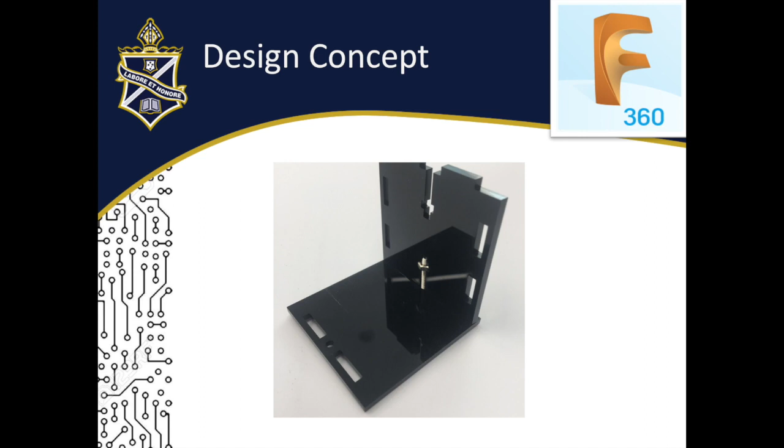Design must take into account the materials being used. The primary examples are material dimensions, the strength of material under tension and compression, and the design must take into account the types of screws being used, specifically their dimensions, which is somewhat dictated by the material being used.

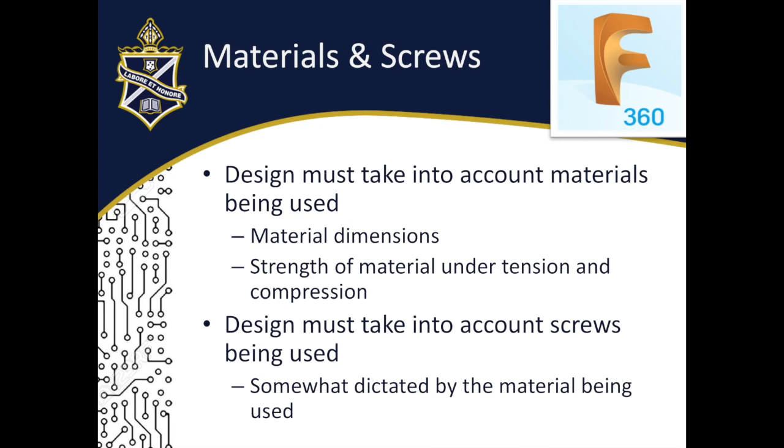The material that we're going to be using by example in this is going to be black acrylic sheeting. So the black acrylic sheeting, we have some key questions before we can begin our design. The key questions are how large are the sheets that we have? What's the largest cut size we can make?

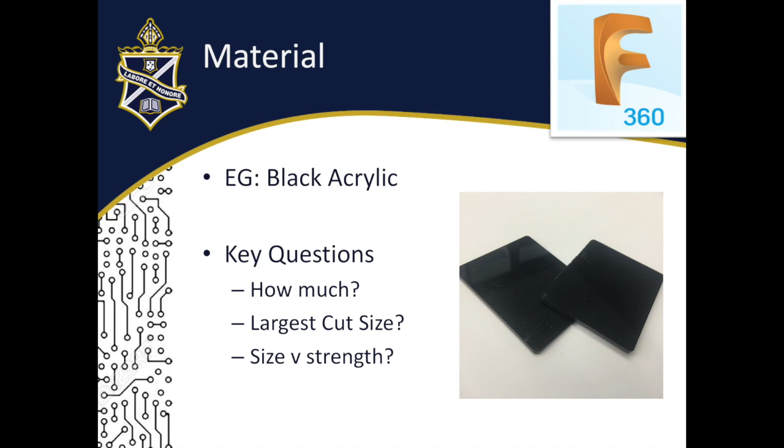And size versus strength. Can our material cope with being cut to the sizes that we're talking about? Will it be strong enough? For example, if we cut something that is 80 centimeters long but only 2 millimeters wide, will it be able to cope with that dimension?

The key property of our material that we're using is the thickness of the material that we're going to be cutting. Our laser will only be able to cut to a certain thickness, but we also need to keep in mind the thickness when we're creating our design. All panels made from the material that we're using can only be extruded in Fusion 360 to this thickness.

The thickness of the black acrylic looks like it measures at 3.2 millimeters. It is roughly 3 millimeters in thickness, so we'll extrude all of the panels made out of black acrylic to 3 millimeters. If we're going to use other sizes, we'll have to make those panels that thickness. For example, if we were joining 3 millimeter black acrylic with 12 millimeter pine, we would have to actually make those adjustments in our model on Fusion 360.

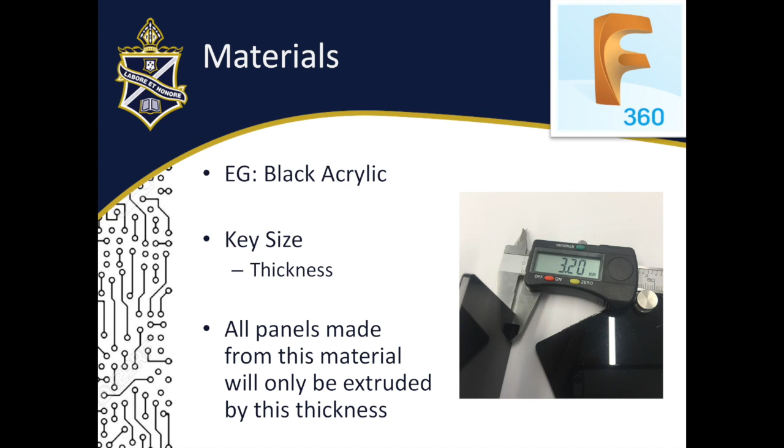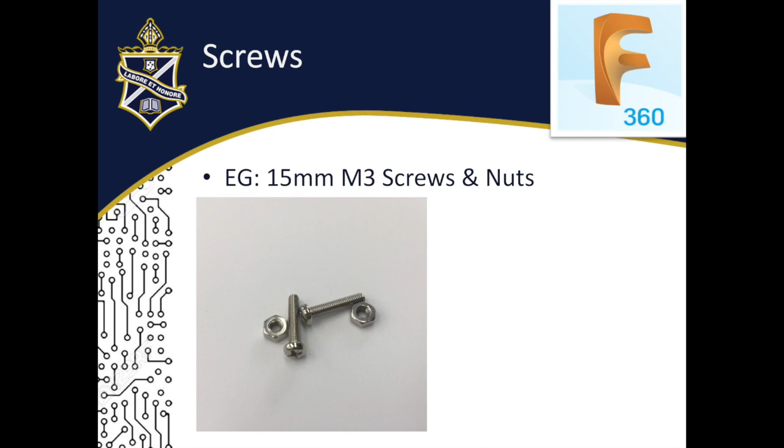Our hardware that we're going to use, the screws and nuts, also change the way that we do our design. The key part of these screws is the measurements that we have to do. We need to ensure that we measure carefully enough to be able to create a 3D model in Fusion 360. You can also research these measurements by looking up the size of the screw online.

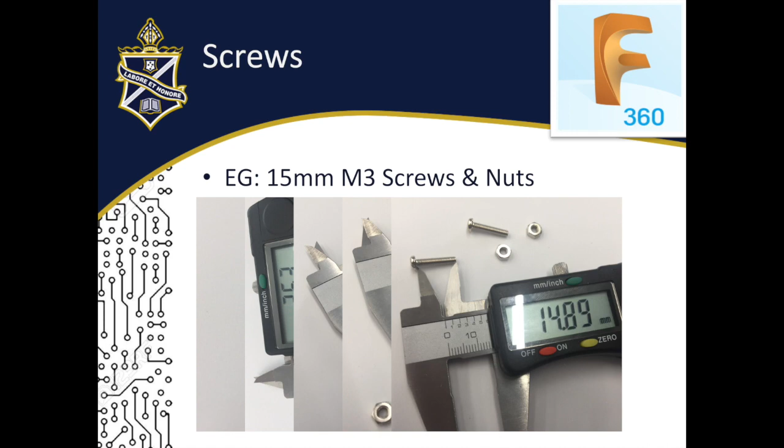For example, if I did a search on M3 screws and nuts, I should be able to get diagrams which show measurements on them. However, sometimes you don't know what size the screw you are using is, so you need to do lots of measurements. Once your measurements are complete, you should be able to draw them in Fusion 360 like I have now, or you can sketch them on a piece of paper.

I would only really go to the effort of drawing them in Fusion 360 if I was presenting to a client who was paying money and they wanted to see what the end result would look like with the screws in place, or if I was putting it into a portfolio for marking, I would definitely put the screws in any render that I did.

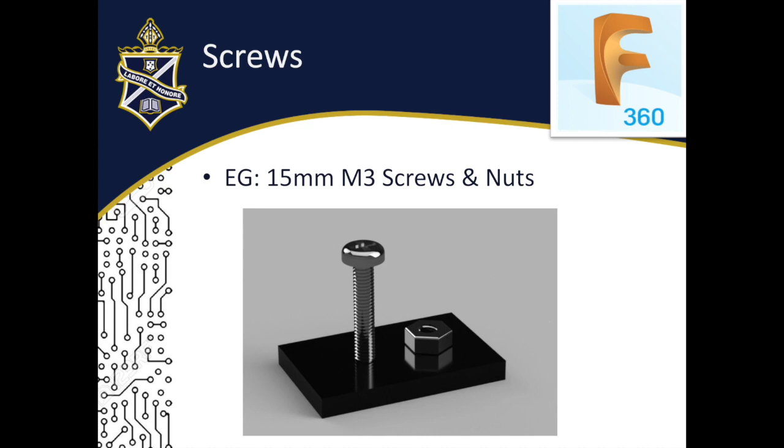The procedural overview that we'll be going through is that we need to first create an overlapping panel model. Basically, all of the panels that we will use will overlap into each other so that we can create joints later. Once we've created all the panels in place, then we create the material joints. Once we've created the material joints, then we can create the screw provisioning if needed.

For the first part, we're going to go into Fusion 360 and create our overlapping panel model. So here we are in Fusion 360, and here is the nut and bolt that I've modeled, which match perfectly to scale the measurements I've done on my particular nut and bolt that I'm using, which is an M3 15 millimeter long nut and bolt.

I don't need to use those in my model, and as I said, you would only use those in your model if you are A, selling to a customer and they wanted to see what it was going to look like, or B, if you're trying to get really good marks in your portfolio and you want to show the final product before you actually do it, so that you can do a compare and contrast and you can do evaluations and all that sort of thing. Showing those extra features will probably earn you extra marks because you're showing a greater understanding and vision.

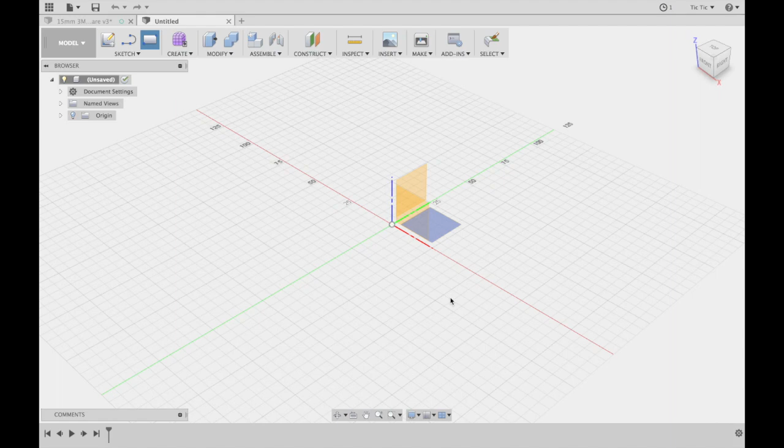But anyway, we're going to create a new file and we're going to create a new design. And for this design, I'm going to create a simple box with a couple of legs on it, so that we can cut out a box with no top, so that we can maybe put pencils or something in it, like a pencil holder on a desk, that sort of thing. So let's start with a new sketch. And basically my new sketch, I'm going to start with the main side that I'm going to use, which is going to be on this one here.

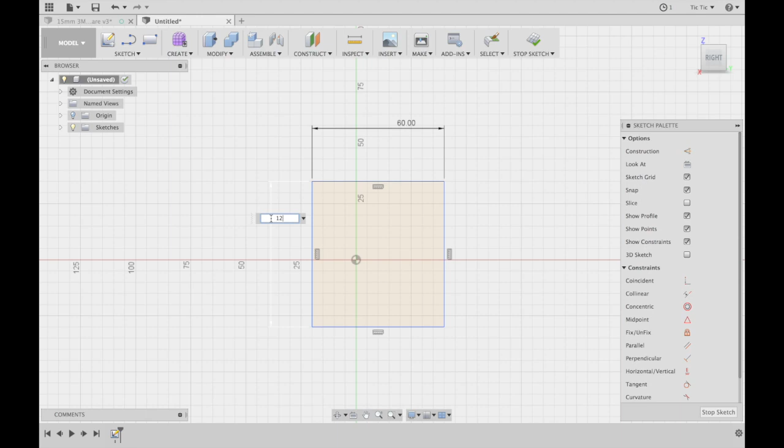And I'm going to create a rectangle. The rectangle is going to be of a size, let's set the dimensions straight off, let's just go 60 wide, so 60 millimeters wide, and we're going to go twice as high as wide, so 120 millimeters tall. Let's make sure that's in the middle. There are probably nicer ways of doing this, but I just tend to do it by typing in these dimensions here and here, and that's going to be set in the middle now. If I press on that and go 60, so I'm happy with that.

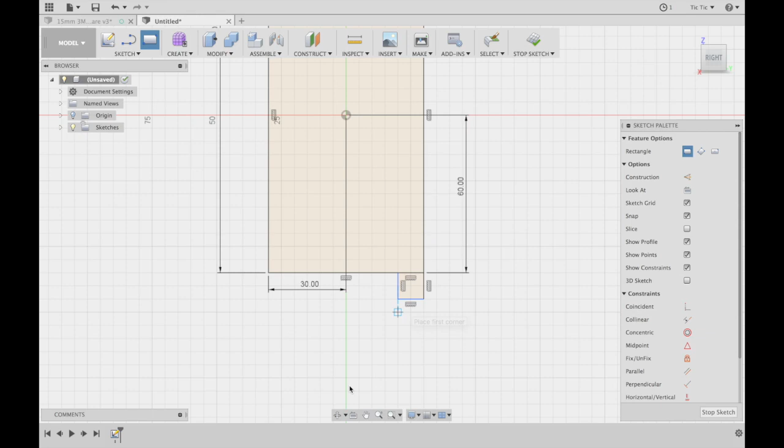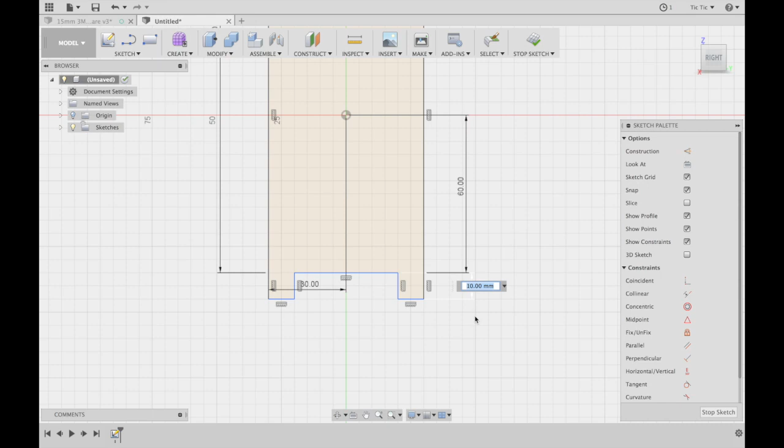I'm going to put some legs on it now. So basically going to come down here. I'm going to put another couple of rectangles. Let's put one there. We'll go out to that big, and we're going to put a rectangle here of that big. And now that I've got that, I'm going to trim off some excess pieces. Let's trim them off twice, so those are all trimmed off. They're 10 by 10, but let's just add that now. So let's go dimension here on this one of 10, just to make sure, and a dimension here of this one of 10. So those are set, and then we're going to do the same here, dimension of 10 and a dimension of 10. And that will be good.

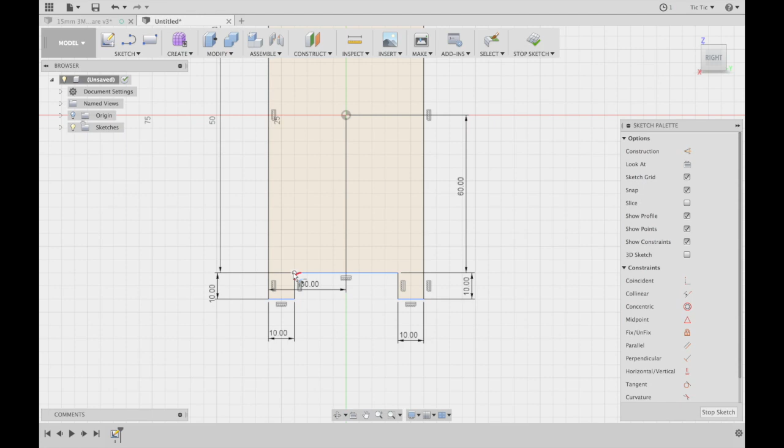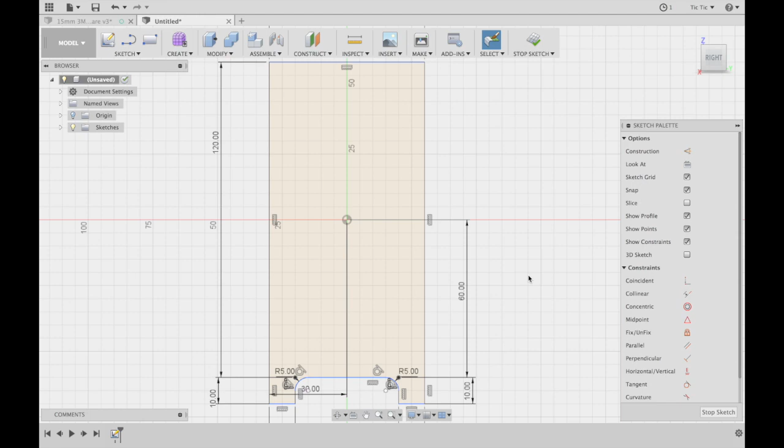Let's also just add a nice fillet in there to see what that's going to look like. And the fillet is going to be, let's just make it a nice 5 there. We'll do the same thing on the other side. Unfortunately, there's no shortcut for fillet when you're in sketch mode. And then go 5 on that side as well. So that we've got our piece there. That's going to be the side of the box. That'll be the feet or legs. I'm going to hit stop sketch now. I'm pretty happy with that size.

I'm now going to extrude it, and remember our material is 3 millimeters, so we're going to extrude it 3 millimeters. So that's our material there, and I'm using black plastic, so I'm going to change it straight away. Appearance, glossy black plastic, drag that on there. You can see that it's now blacker. I'll close that appearance panel, so that now I can see what I'm doing. For the benefits of this though, I actually might change the appearance to something lighter. So I'm going to choose a grey matte for the time being, so that I can better see it on the video. So I'm going to hit close. So that's my material there.

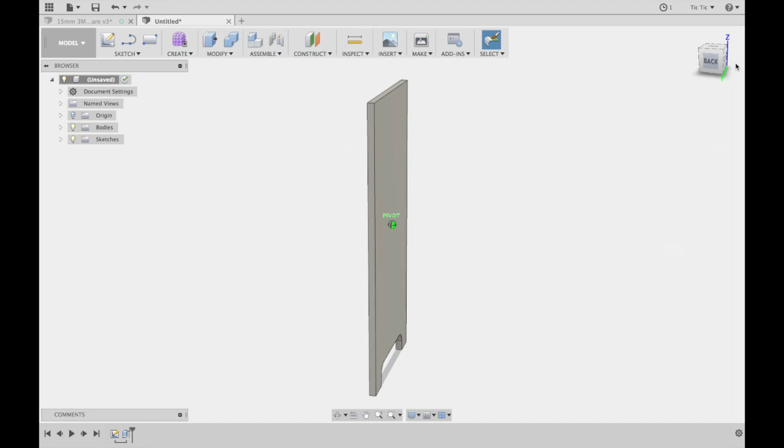I'm going to need 2 of these side panels. And you notice I haven't used components. I find using components a little bit funny when I'm designing like this.

But instead I'm going to rename my body. And my body is going to have the name of side panel. So I've got the side panel there. I've got caps lock on, so I'll turn that off. And I'm going to need 2 side panels.

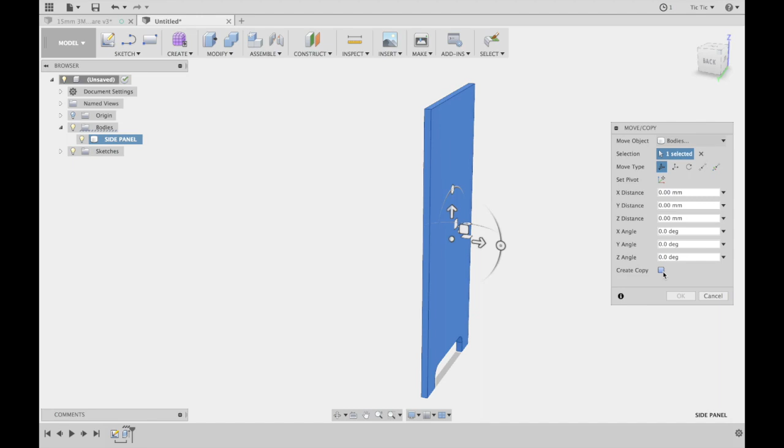So I'm instantly going to press the move key, and I'm going to move bodies. And I'll hover over this one here until it locks on the middle, and I'm going to create a copy. I'm going to move this one to be -60. I'll just leave it like that, -60 across, OK. So now I've got two panels.

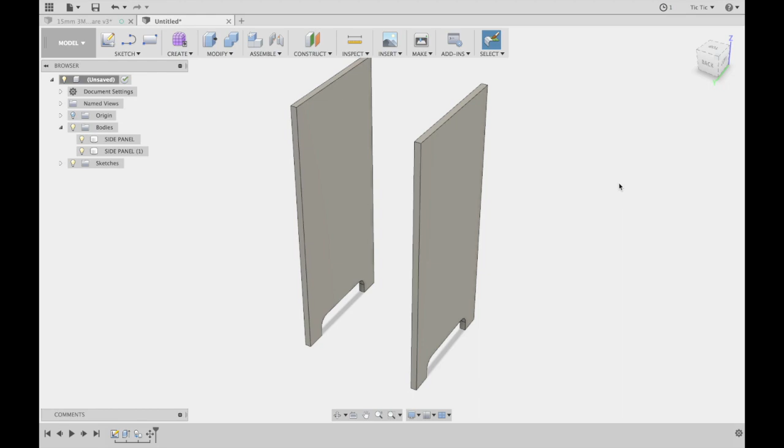I'm now going to draw in my side panels, or my front panel, this one on this front and back. So basically the thing that's going to hold the pens inside here between there and there. So let's create that on the side panel. I'm going to do that by creating a rectangle sketch, and I'm going to create it on this one here. So this new panel here, the side panel 1, I'm going to turn the other one off for the time being, so that I can see what I'm doing.

And I'm going to create a sketch on this that's just going to be a rectangle. I'm just going to draw the rectangle roughly in place, roughly where I want it, but not totally where I want it. Now with this type of design, particularly when you're working with 3mm, you can't join them right on the edge. If you're working with a thicker measurement, you could probably join them on the edge and use a smaller diameter screw, but I don't have a smaller diameter screw that's going to match this, and if I go too close to the edge, it's going to be a weakened joint.

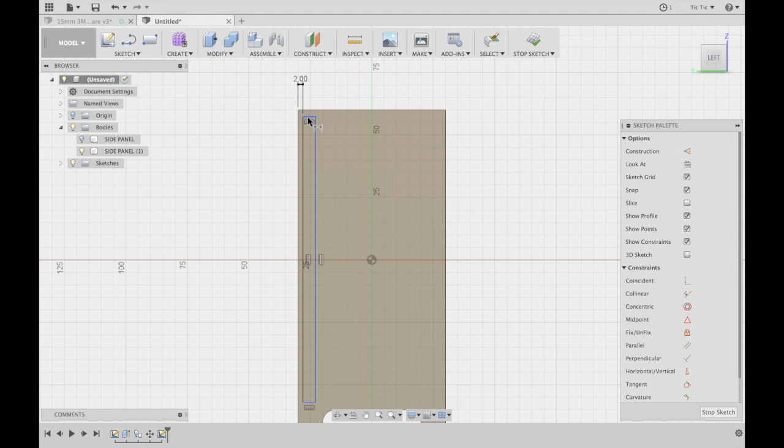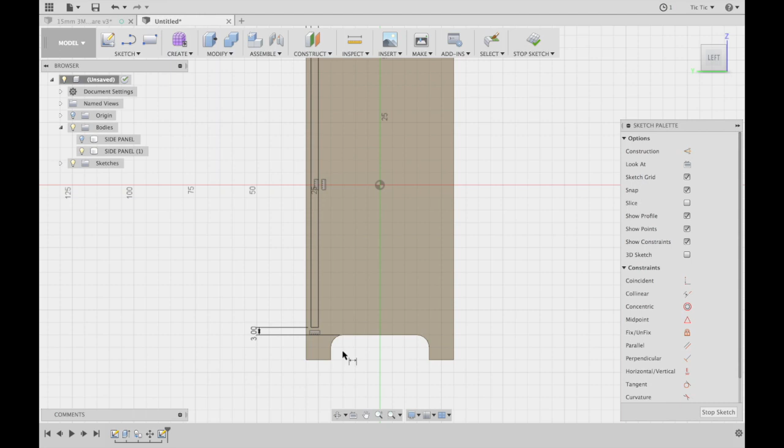So basically I'm going to bring it in. So the first one I'm going to do is I'm going to bring the distance in here to be 2mm. So it's going to be in 2mm from the end. The thickness of this panel is going to be 3mm, which is the thickness of our material that we're using. I'm going to basically bring it so that the distance from the base here to this point here is going to be a nice even 3mm as well. So there's going to be a 3mm gap at the bottom there. So it's not going to go all the way to the bottom. So you can see that I've got that in place.

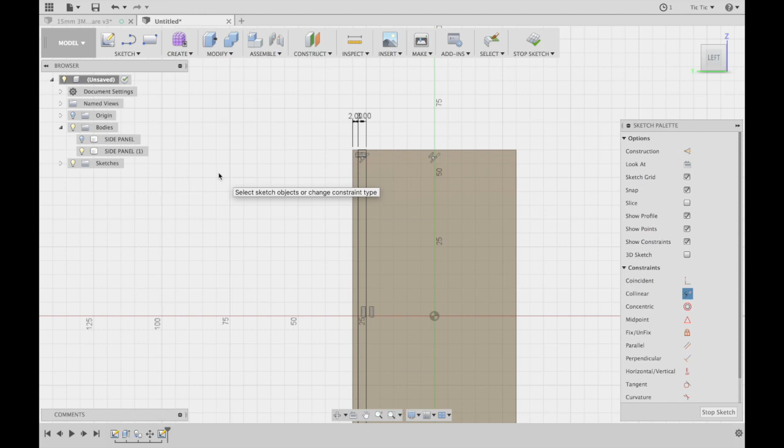The final thing I'm going to do is, am I going to bring that line all the way to the top? Yeah, I might just do that. I might bring it all the way to the top. So to make that all the way to the top, what I can do is use the collinear button and make those in line. So now I've got that object there. So now if I hit stop sketch, it'll take me back to this view here. So this is the home view. You can see that it's turned me right around.

And on the home view, the first thing I'm going to do now is I'm going to turn the other panel on. So you can see that it's swinging around really quick. There it is there. That is what I'm going to extrude out into this one. So let's just press the modify and extrude that rectangle there, that panel there. And we're going to do it slightly differently to normal. We're not going to drag it out. We're going to use a two-sided direction for starters.

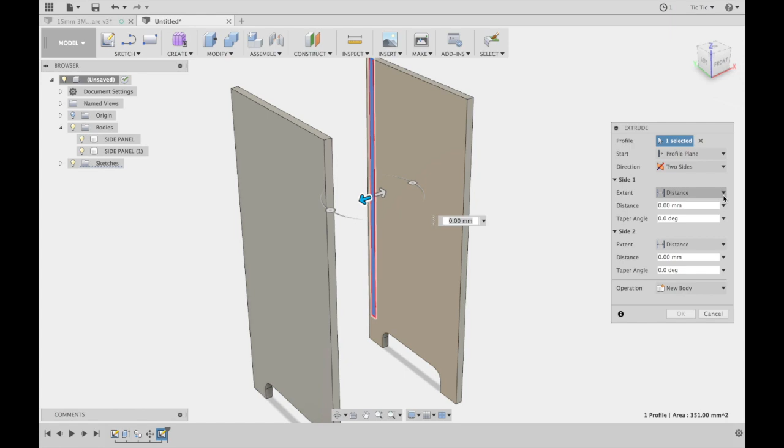And our extent of our first side, which is the side coming out this side, is not going to be a distance. It's going to be a to object, and we're going to bring it to the face of this one, and you'll instantly see that it's now cutting. We're going to make sure that we use new body, nothing but new body.

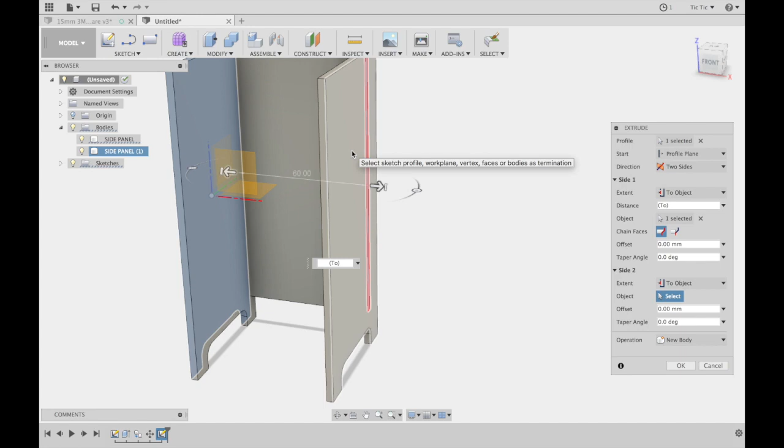The second distance we need to go out is also going to be to object, and it's going to be to the face on this side. And we're creating a new body, so we should have a panel that goes all the way through that panel and a panel that goes all the way through this panel. And now we're going to click on OK. So we now have another panel. We're now going to bring in or duplicate this top panel.

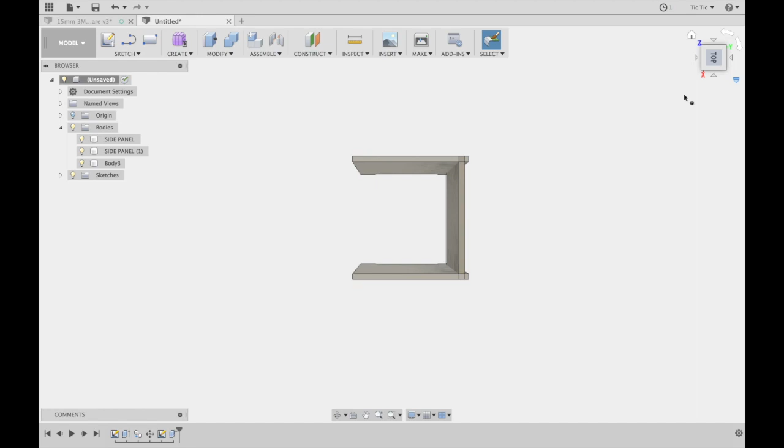So let's go to the top here in feature, and we notice that we're in perspective. I'm going to change that to orthographic so that I'm totally in top mode, so I can easily see this. I'm going to press M for move. I'm going to move the bodies, and I'm going to basically make it so that it's moving this way.

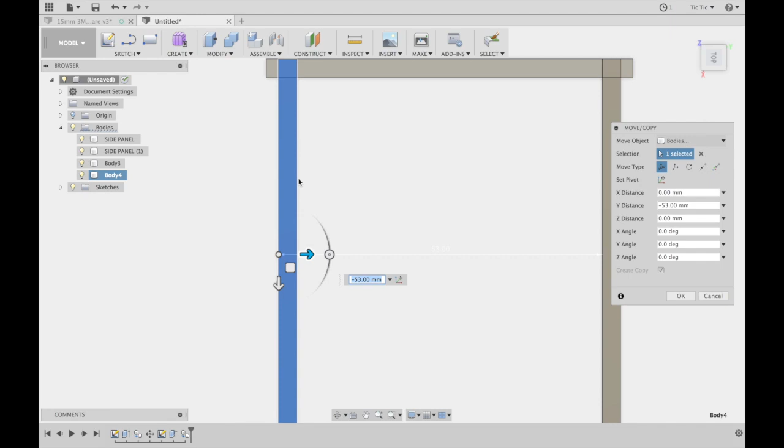I'm going to create a copy. I'm going to move it across to here. Now notice it's only moving in 5mm increments. If I zoom up, I should be able to go back 1, back 2mm, and there I've got that extra body there. So I'm going to press OK.

I'm now going to name this the front panel, and I'm going to rename this one the back panel. It doesn't really matter. I could just call them both front panels. And now I'm going to go back to my view here. You can see now that I've got those panels in place.

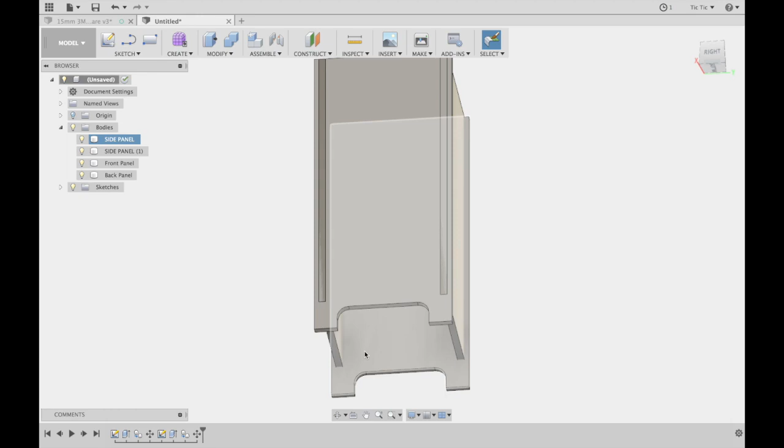I now need to put a floor into my design here, and the floor that I'm going to use is only going to integrate with this panel here. So it's not going to go through the front and back panel. It's just going to go through the side panel. So basically I don't want the front panel, or actually I do want the front panel. I don't want that panel there.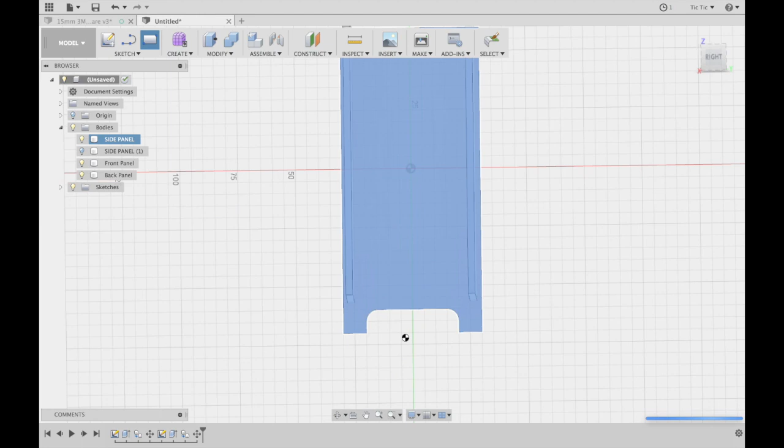So I'm going to do a rectangle on this face here, and that rectangle is just going to sit perfectly from here up to here somewhere. And that distance, I should have basically typed the distance in. That distance is going to be 3 millimeters. And I'm going to hit stop sketch. I'm now going to press modify, and I'm going to click on this one. And once again, I'm going to turn this front panel on.

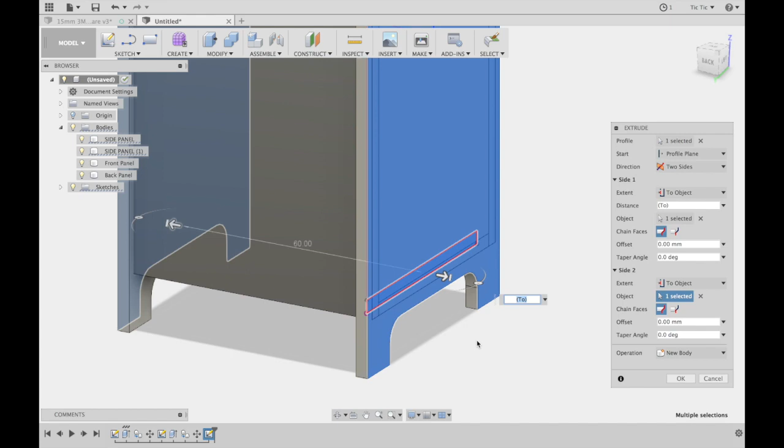I'm going to choose a two-sided extrusion. I'm going to extrude to object and go to the front of this object. I'm going to change that straight away to new body. I'm going to go to the other side and choose object. I could just type in 3 millimeters, but I'm going to type in to object. And the object I'm going to use is this face here. So now that goes all the way through. I'm going to click on OK. And I'm pretty happy with that.

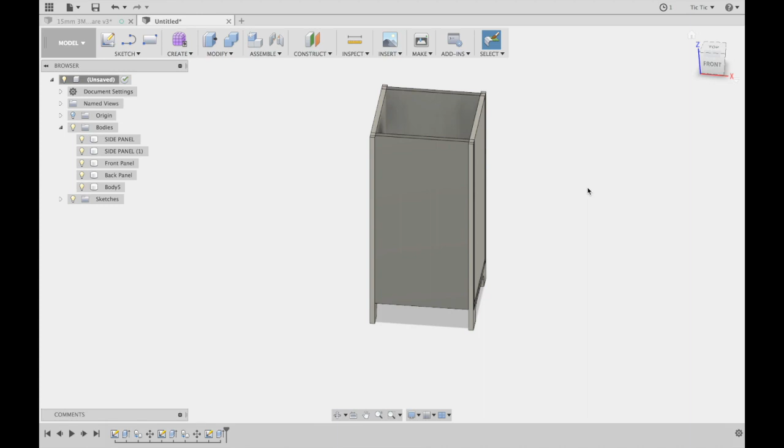If I wanted to put any holes in it, now would be the time to do it. So if I want to have any holes in here or in the side panels, that's the time to do it. Right now though, I'm not interested in putting any holes in. Maybe I want to put some chamfers in, I don't know, but let's just go to the home button and see. I'm pretty happy with that. So it's now time to move to the next phase.

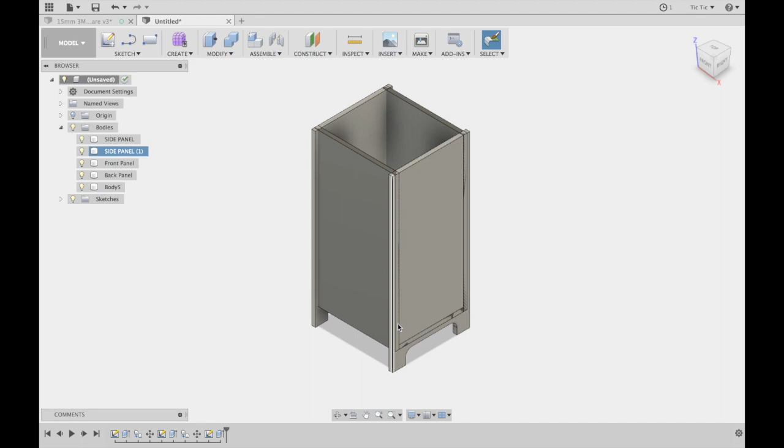So these ones here, I'm going to get rid of the side panels from view at the moment. And I'm going to get rid of the bottom panel. This is the base. I should rename that the base, and just get rid of that from view as well. I'm going to create a sketch with the rectangle tool, and I'm going to start up in this top corner here. I like to make mine nice and easy to remember.

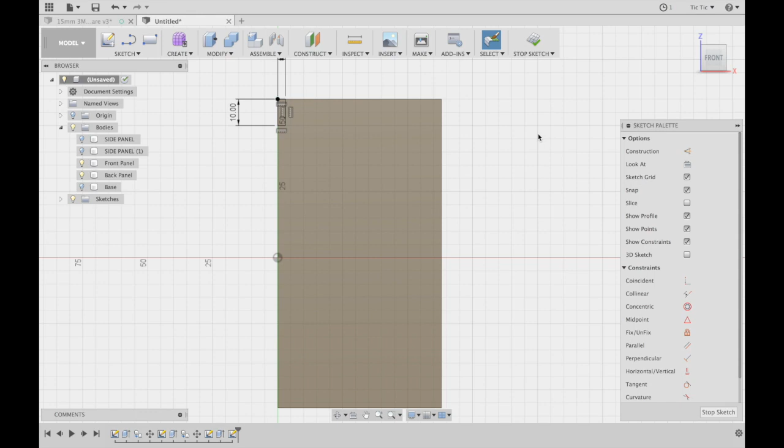So basically, I'm going to draw out my first corner here, and the distance out is going to be 3, and tab, the distance down, we're going to make it a nice easy round 10. So we have that 10 there. So now that I've got that nice easy round 10, I'm going to create a sketch rectangular pattern.

Now this can be tricky to remember, but I'm going to double click so that I've got 4, count them, 4 selected, and I'm going to drag this guy across here until it matches on this side. You can see mine matches on this side. If you've got unusual measurements here, it's going to be an unusual measurement here. So you're going to have to keep on playing with this number until you get it perfectly matched on the other side. I don't need 3 and I don't want 4. I only want 2, so I only want 1 on one side. Let's just drag this guy down here.

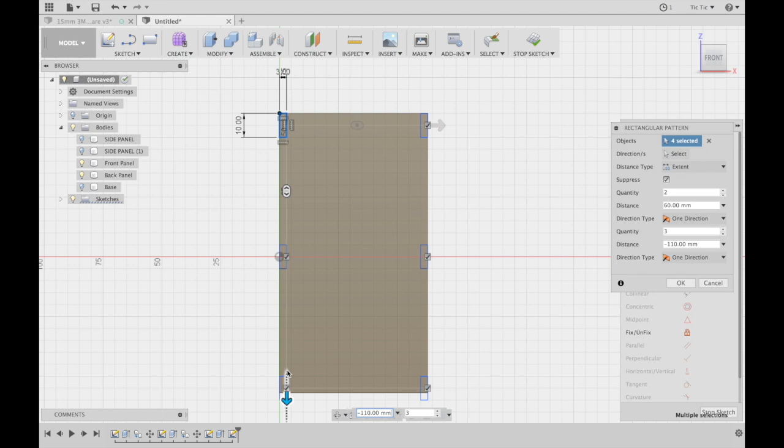So it's on the bottom. So let's zoom up there and move it on to the bottom. You can see 105 is not quite doing it. Let's play around with 106. No, 107. That's got it.

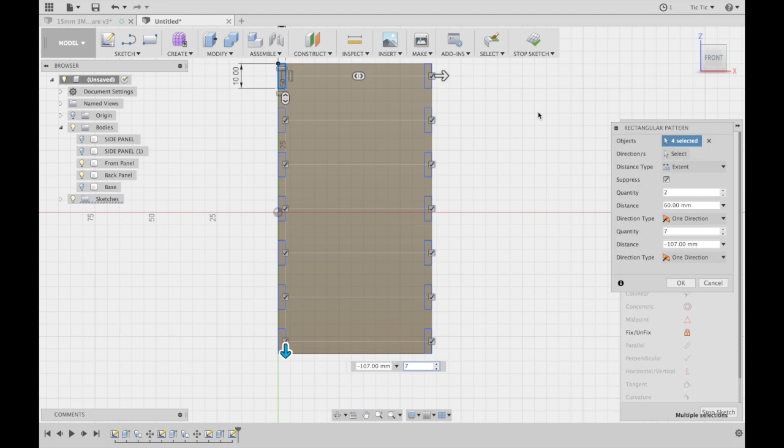I'm going to increase the number of these. So I'm going to go up until I'm happy with the number. And basically, I want there to be a nice number of tabs in there. So I'm happy with that number. I'm going to hit stop sketch.

So we can see now that we've got this object here. I'm going to go modify, and I'm going to select the whole lot, hit cancel. Let's select the whole lot. Okay, I've got the whole lot selected. Now I'm going to hit modify, press pull, and I'm going to deselect... what's going on there. Try that again, modify. I'm going to modify everything, so I really should select everything, but let's just select these things. It didn't seem to want to work for me.

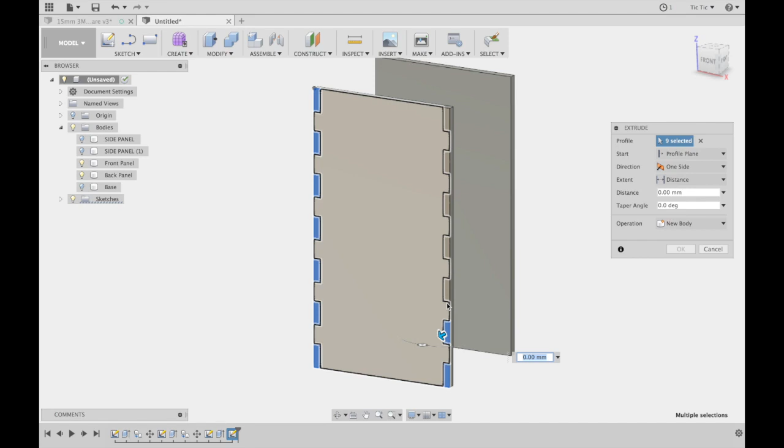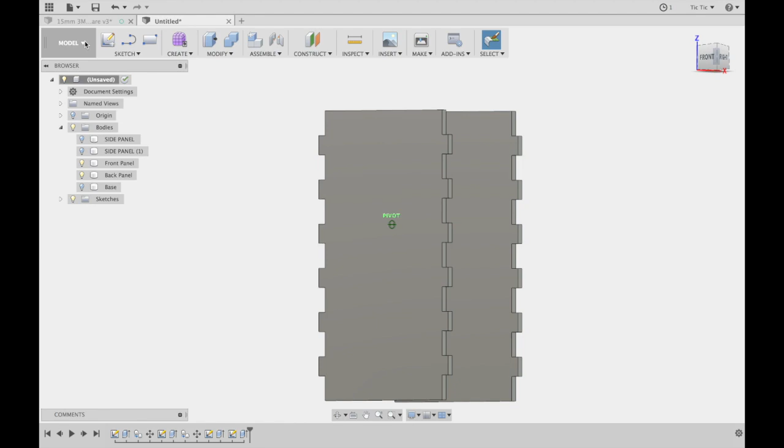All the way through. And then what I really need to do is just go extent to object. And I'm going to choose this object around here, and I'm going to leave it at cut so that it cuts that out. So now we've got 2 finger jointed pieces. So if I go back and turn my side panels on, you can see that those pieces look like they're jointed through, and that's what we're going to look for, except those side panels don't really have holes in them yet, so we're going to do that in a second.

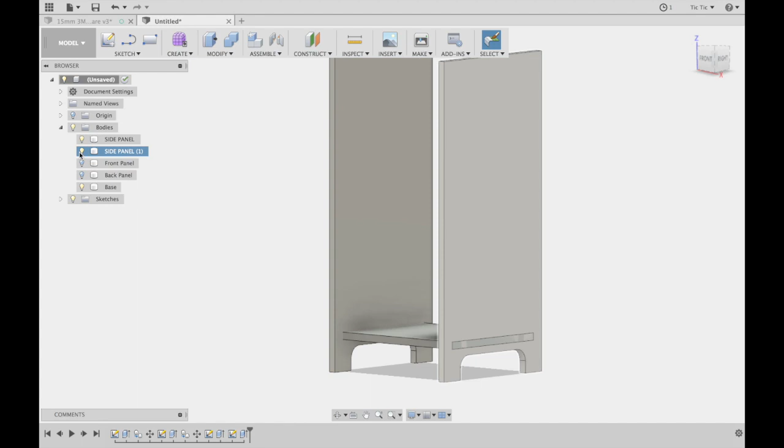The next thing we're going to do is turn that base back on. That base has gone right through, so let's turn everything else off except for the base, and do the same sort of thing with the base. It's a bit repetitive, but let's go rectangle on here, and I'm going to draw a rectangle. Like I said, I like to use 10 millimeters and 3 millimeters, which is the thickness of my material there. And then I'm going to basically use the rectangle tool again.

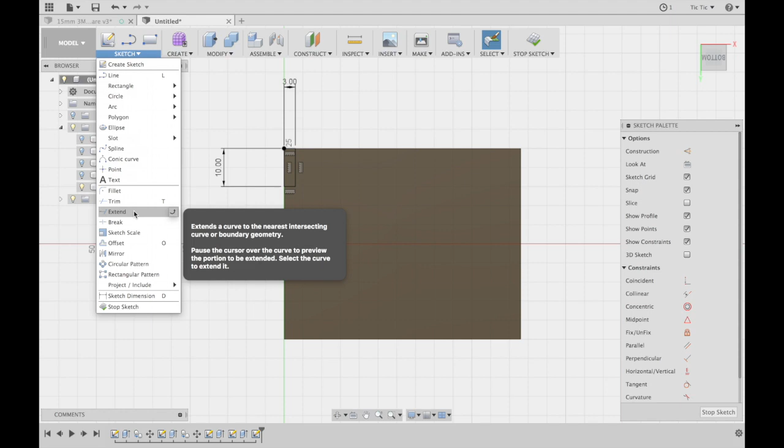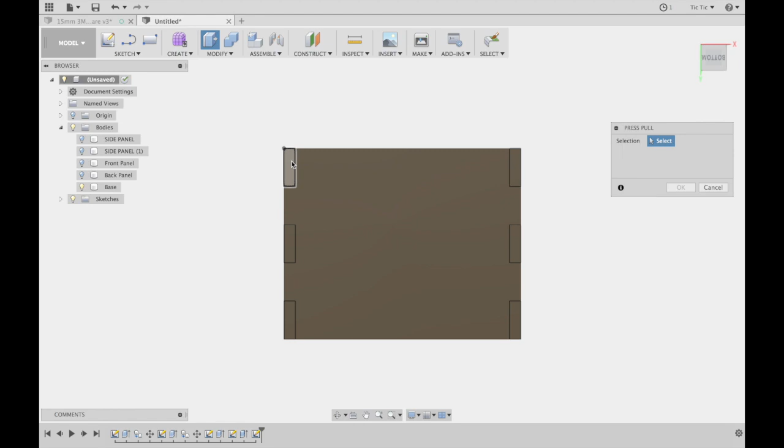So double click on that. Make sure I've got all 4 selected, because if you don't, then you don't copy the whole sketch across. Take that down to 2, and then I'm going to bring this down here, and 3 is actually perfect, so I'm just going to go OK, and then I'm going to press stop sketch. I'm going to press Q to extrude these through, and if I change to the home button and extrude those back up through that object, that's just going to cut nicely. And now if I turn everything back on, you can see what I've got here.

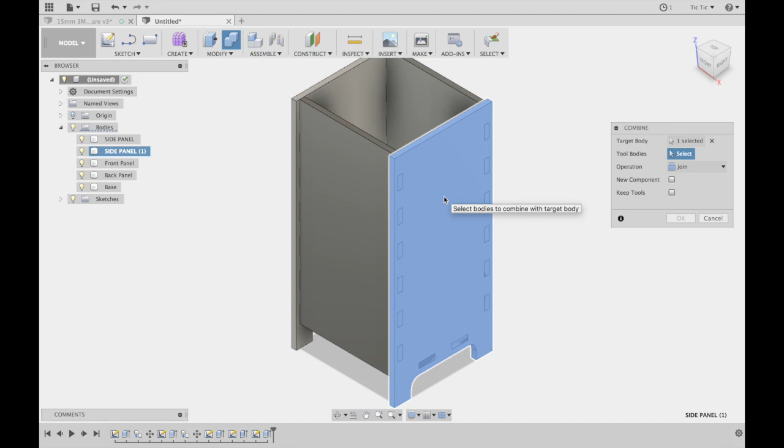I've got these coming through, and now I finally need to do the cutting of the holes, because at the moment, if I just get rid of these other panels, the side panels don't have any holes, and we do need those holes in there, otherwise it just won't work. So basically how we do this is we use the modify combine button. Mine's up here, and I'm going to go for the target body, and I'm going to select the first side panel. My tool bodies are this one, and the bottom one. Everything that's cutting into that one, I'm going to use as a tool.

And my operation is going to be cut, but it's important that I want to keep the tools, otherwise they'll disappear. So I'm going to press OK now. So what that's done is, if I turn the front and the back, you can see now that I've got holes in that particular one there, and that's going to be laser cut into that, so we can actually join those together.

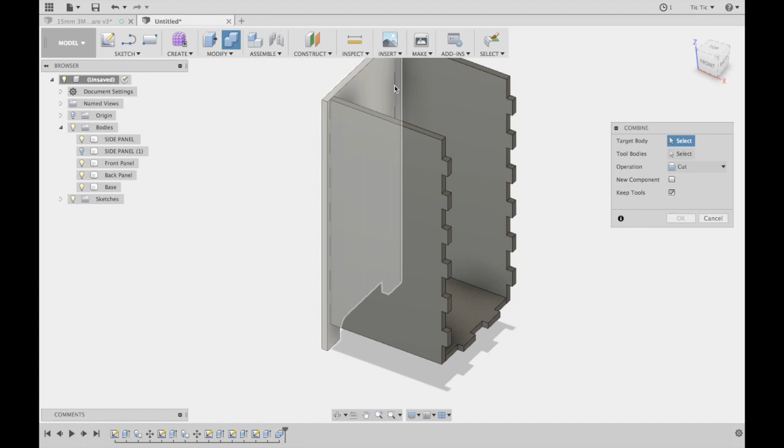We need to do the same thing for the other side, so I'm going to turn these guys back on. It might be easier if I turn the front side panel off, so that side panel off, and I'm going to press modify. My target body is this one, my tool body is this one, and this one.

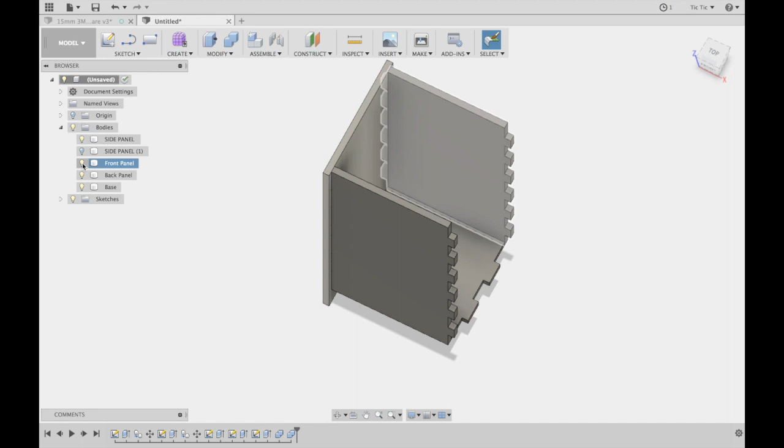See, I've only got one selected because I deselected that one, so I need to actually make it so that I'm not actually, there you go, I'm going to select all of them now. Once again, make sure that keep tools is selected and press OK. So now if I turn these guys off, I should be able to see just that target panel there, and that's quite nice.

So we've got that capability working. So I've got this tall box working. So that is all of the panels done. Now if you were going to rely on glue to join yours together, you could use that and just leave it at that. I've found that working with glue and acrylic is particularly hard to do, but if you are just going to rely on glue, that would be a nicely jointed part, and it would just work.

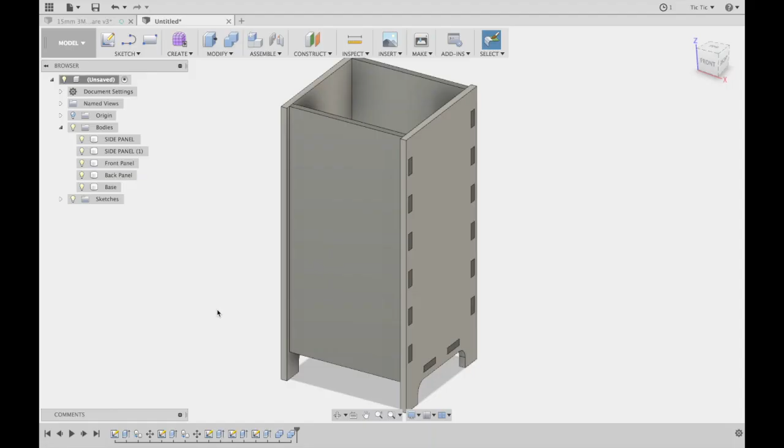The final part that we need to do is to be able to create our screw provisioning. The screw provisioning dimensions will vary depending on the screws that you are using, and you will have to rely on your measurements that you have made or the specifications of those screws that you have pulled up from the internet. So the idea with these screws is that they're going to screw in through this panel here and into this panel here, and there's going to be a nut on this side that is going to pull these two panels together. It's a fairly straightforward idea.

So we're going to need a hole drilled through this end, and I often forget to do my holes. And then we're going to need a funny sort of cross-shaped basic pattern cut into this section here so that it lines up perfectly with the hole on this side. So I always do the holes last so that I know that they're going to line up. And this part can be a little bit tedious, but we're going to get through it anyway.

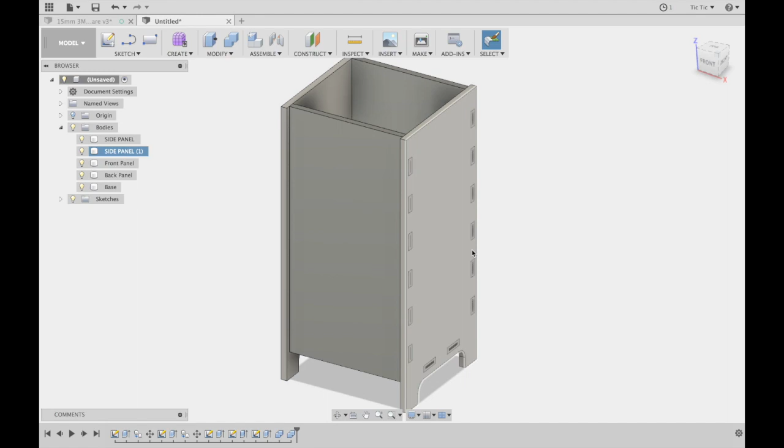So the first part that I'm going to do, I'm going to draw it on this panel only. So I'm going to turn off all the other panels, and you can right click and go isolate. And isolate will get rid of all the other panels. So that panel is going to be there. I'm going to go to the front view. So the screw is going to start here, right on this edge here, and pass through into this section. So let's just zoom right up onto this section and just draw it here.

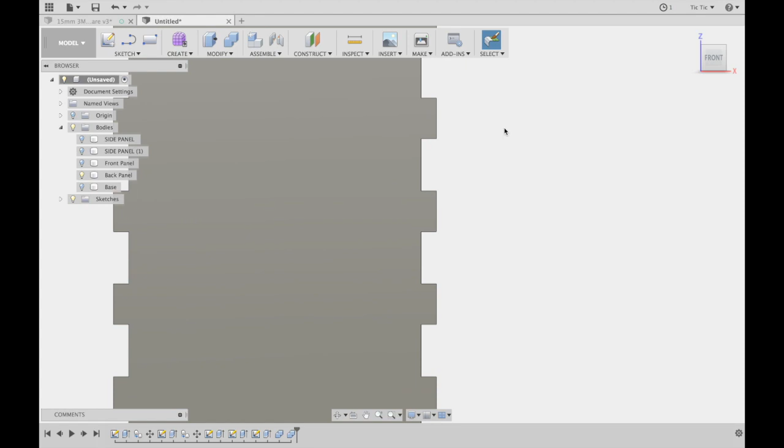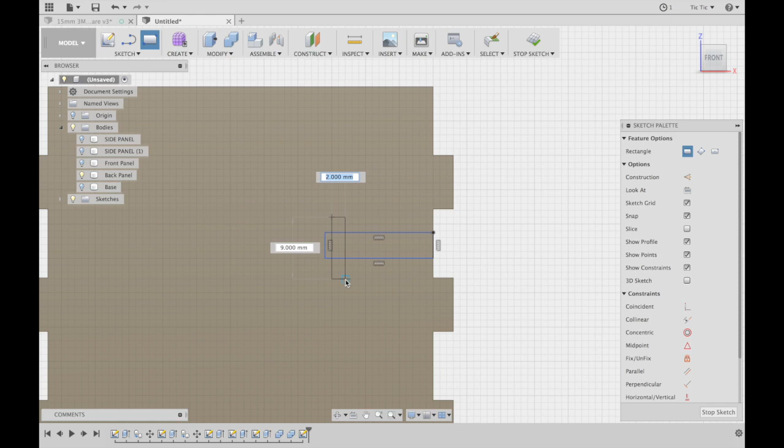And we're going to draw it with the rectangle tool. We'll start on this face, and we're going to draw a rectangle, right? So basically I'm just going to draw any old rectangle, and we're going to dimension it in a second, but we're also going to have a rectangle here as well to be where the nut's going to be, and once again we're going to dimension it now.

So the first dimension I'm going to play with is this one here, and this dimension is 3mm for me because I'm using an M3 screw, and I've already measured it. The diameter of the threaded part of the screw is 3mm or 2.9 something millimeters, and now I'm going to make sure it's in the middle. Now this distance here to here, can we measure it? Well, we can measure it and then we can see that it's 10. We can't actually put a measurement on it, but we can say it's going to be 10. So we're going to press OK, and that's a measurement.

That's 10mm difference. So I'm going to basically say that this is 3mm here. To put it in the middle, I'm going to take 3 off 10, which will give me 7, and divide that by 2, which will give me 3.5, and move this to be 3.5mm. I'll type that in, 3.5mm, which will put it exactly in the center. That's really helpful.

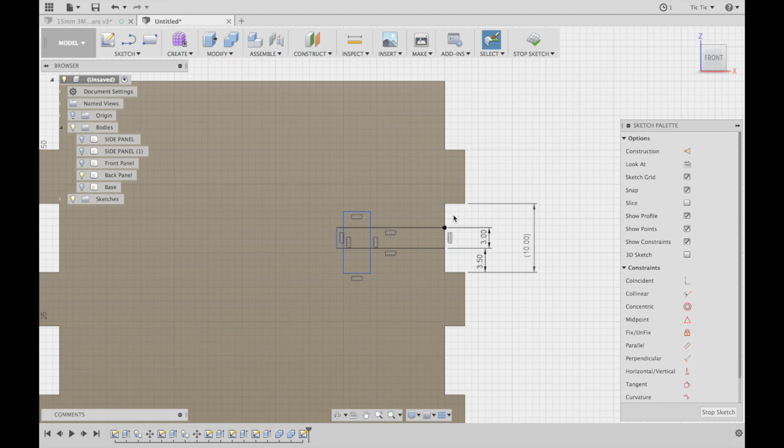Now my screw, from underneath the cap to the end of the screw, is 15mm. That's the actual specifications. I like to add an extra millimeter, so let's make that 16 so that I've got a bit of room to move. And if I go with the 16mm on that screw, then I realize that I've got 3 taken up by the first bit of material. That leaves me 13mm for this distance here to here.

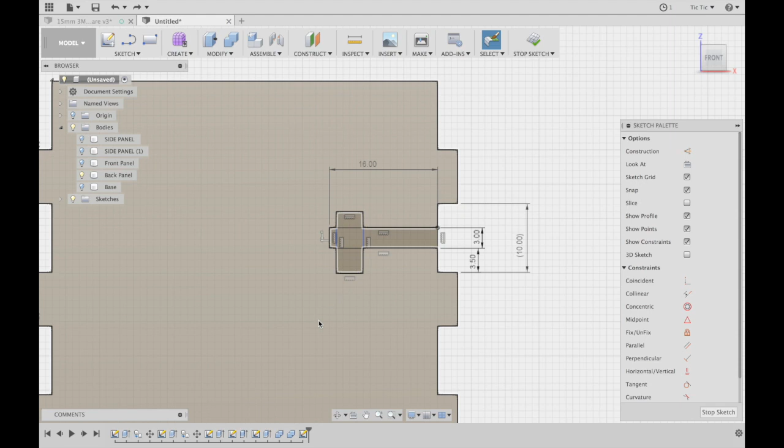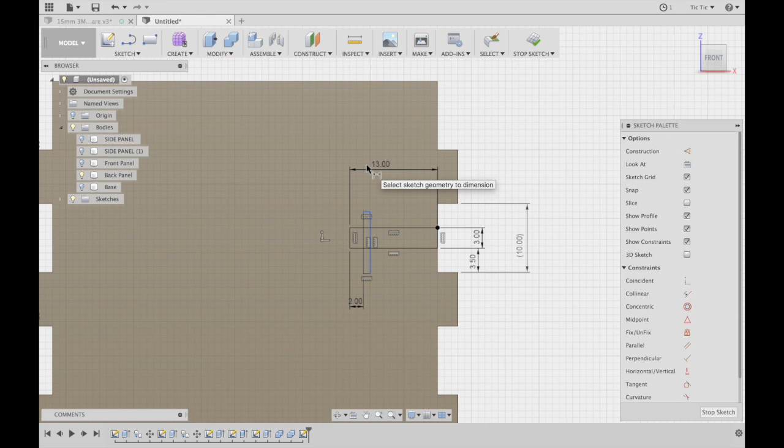Dimension, I said, from here to here, and let's just make that dimension 2mm. Okay, so we've got a 2mm dimension here, and now I can double click on this and change this to, what did I say, 13, and that's going to move that to there. This dimension here, let's zoom up, of this object here, for my particular nut, so the thickness of my nut, I reckon about 2.7 will actually get it right.

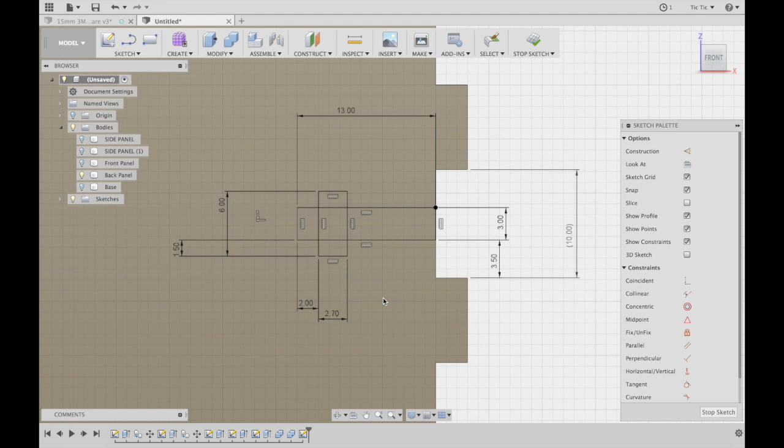And the distance from here across this part is actually 6. So that's going to be measuring that. And this distance from here to here is going to be 6 minus 3, because we've got the measurement of the middle diameter, divided by 2, which is going to be 1.5. That's going to go through there. So that's basically created that hole. I'm now going to go T to trim and get rid of that, and that, and that, and that. So we can now see that we've got

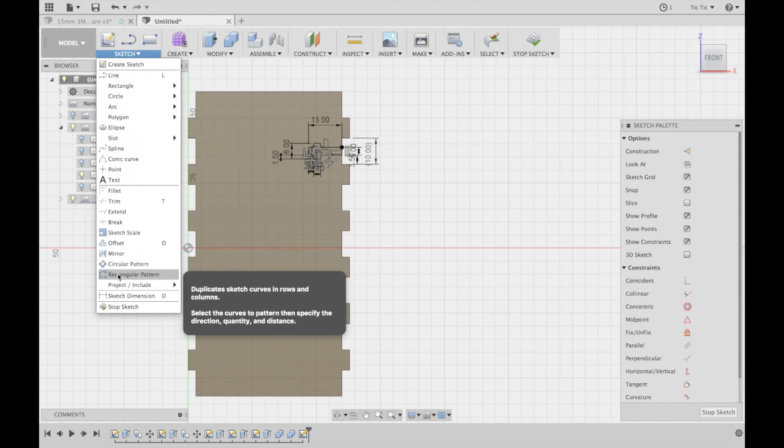that happening. Now, if I want to copy this down in lots of ways, so if I wanted to have heaps of these, you generally don't need a lot of screws. For this, something this small, I'm going to use 2. So I'm going to use the pattern tool again to get this. So I'm going to go Sketch, and I'm going to go to the rectangular pattern tool, and I'm going to start with 1, 2, 3, 4, 5, 6, 7, 8, 9, 10, 11 lines. So I should have 11 things selected, and I'm going to move it down here until I'm happy with where it's going to go.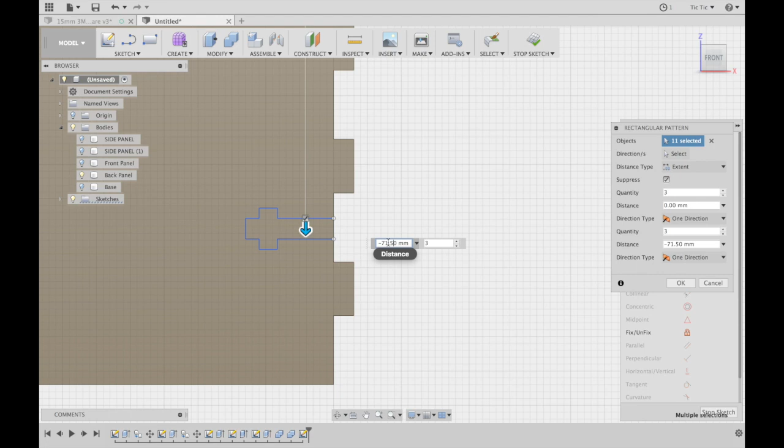And it's going to go on that one there, and you're going to find that this is a bizarre number to play with, maybe. So if I go 71 maybe, or 71.5, that looks about right. So I've got 3. I said I only want 2. 3 is going to be overkill, so I'm going to go down to 2, and I can't move it out this side because they're going to be the wrong way around, but there's an easy way around that. So I'm going to press OK to have that rectangular pattern there happening.

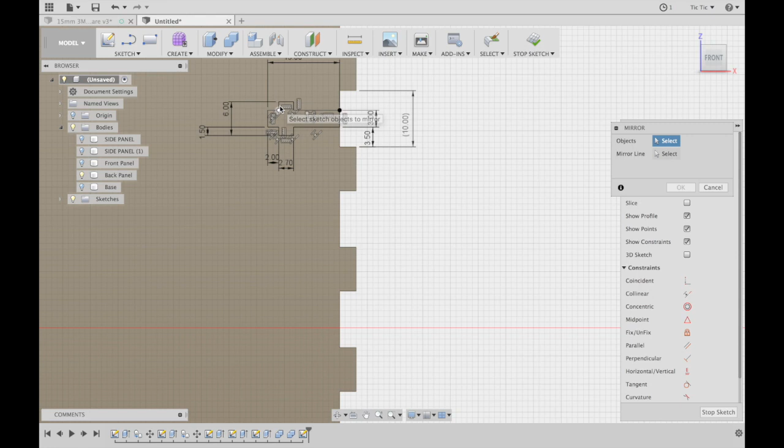I'm now going to do a mirror on the sketch, and I'm going to select all of the objects. So use the select tool and select all of the objects except for that one. No, right, sorry, my bad. I'm going to use the mirror tool, and I'm going to select by making sure I grab all of these guys around here, and there's something I know I've forgotten to do, and that's what it is. Stop, my bad. I'm going to hit cancel.

First thing I'm going to do, I'm going to press P to project, and I'm going to project this line here and this line here under my sketch. That means I can now use those lines on my sketch. I'm going to press L to draw a line, and I'm going to make it a construction line, and it's going to start from the midpoint, and the midpoint's that triangle there, and go down to the midpoint here, and there's a triangle appearing there too. Let's turn that construction line off now. Now I've got something to mirror around.

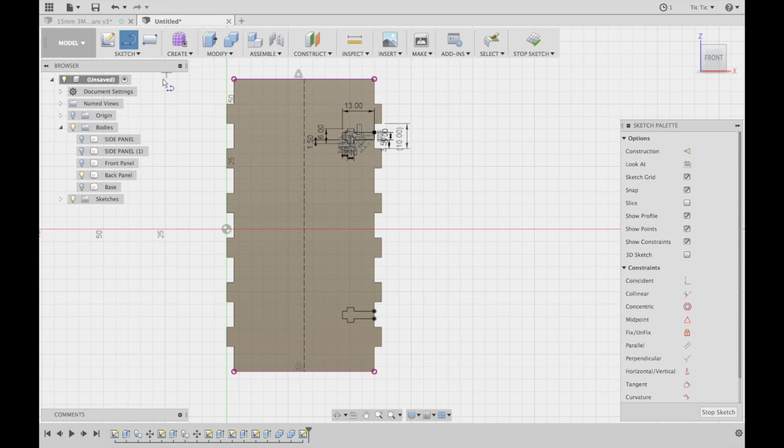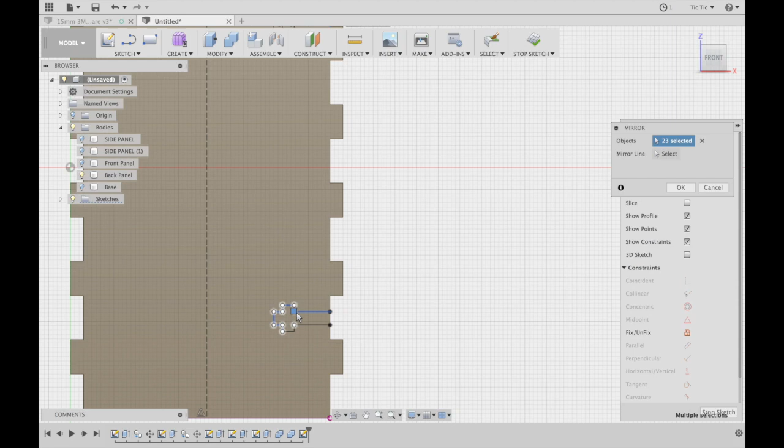So I'm going to go back and choose mirror now, making sure that I've selected everything on this one. So all of these lines here. It's really hard to know that I've selected them all. And let's make sure we also select all of these lines here. So I've got all those things selected. And now I'm going to select the mirror line. And they should appear over that side. So if I hit stop sketch now, I should be able to press Q.

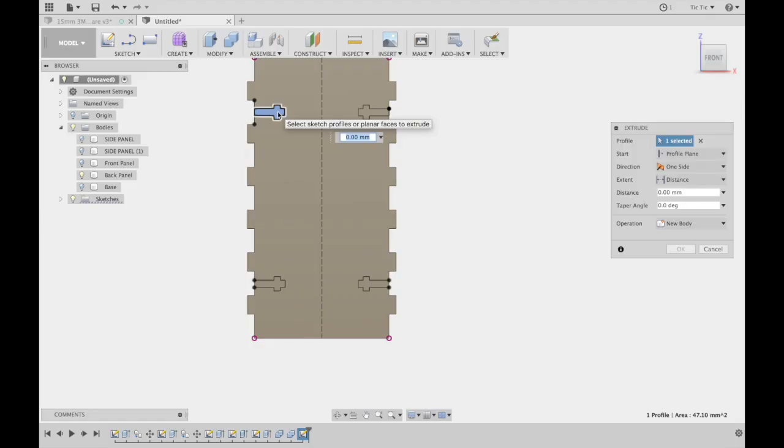So I need to select this one, and this one, and this one, and this one. This is rather complicated. I've done this now, and now I'm going to turn on the other panel on the other side, and I'm going to extrude those just right through, all the way through, and press OK. So that's got that done.

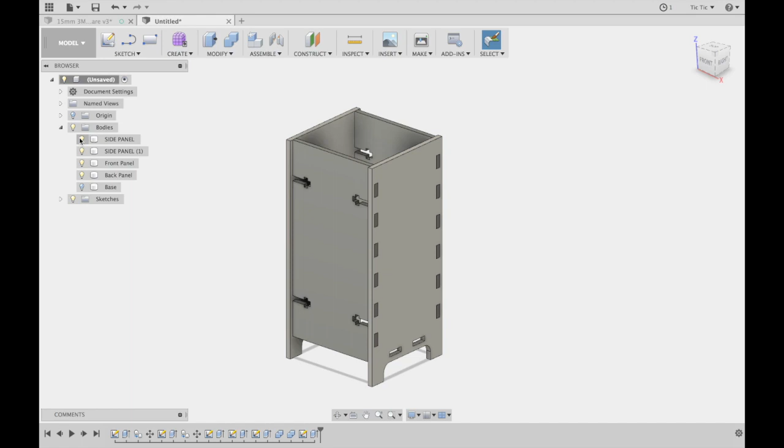I now need to remember to do the holes, because there are no holes for screws there. So pretty tricky, but basically what you're going to do is work your way around all of these things and draw a circle. Circle's going to go in here, and it's going to be a 3mm circle for my M3 screw.

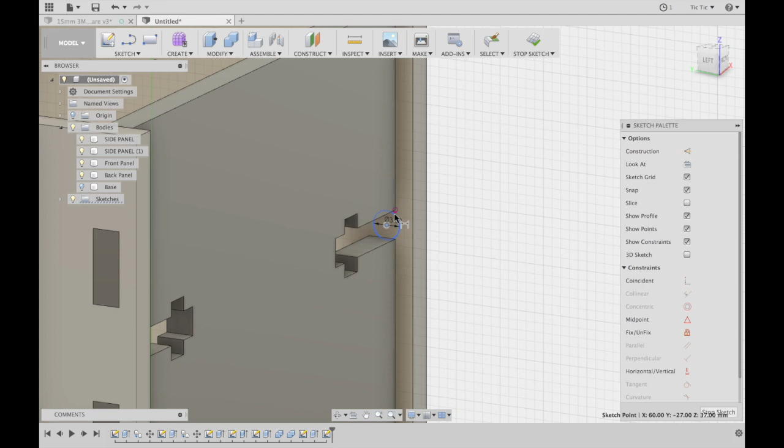And if I press P to project and just project that point there, I can then use the dimensioning tool to make it so that it's 1.5 that way and 1.5 that way. Okay, and then I'm going to work my way around and do all of them. I'm going to basically press pause at this point because I don't want to sit there and have you watch me do all of them.

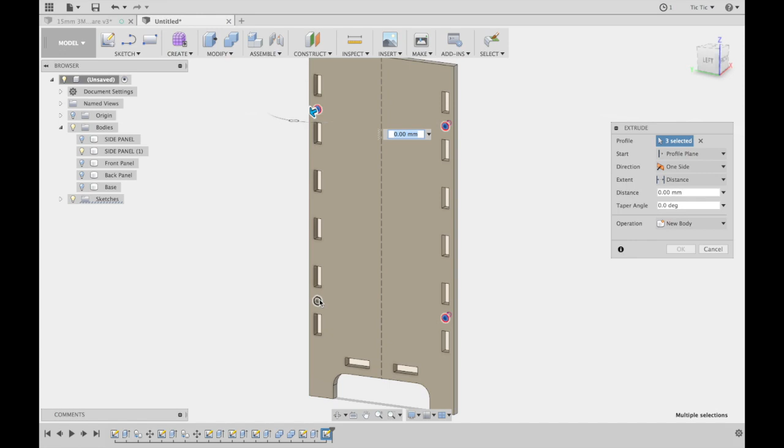So I projected a mirror across there to get those last ones done. Now I'm going to basically turn on the other front side panel. I'm going to press E to extrude this guy and this guy, and I can't see that one, so I'm going to turn the front panel off. This guy and this guy, but before I extrude, I'm going to turn that panel back on again. And it's probably a good idea just to go to object and click on this one. That's going to cut right through now, and press OK.

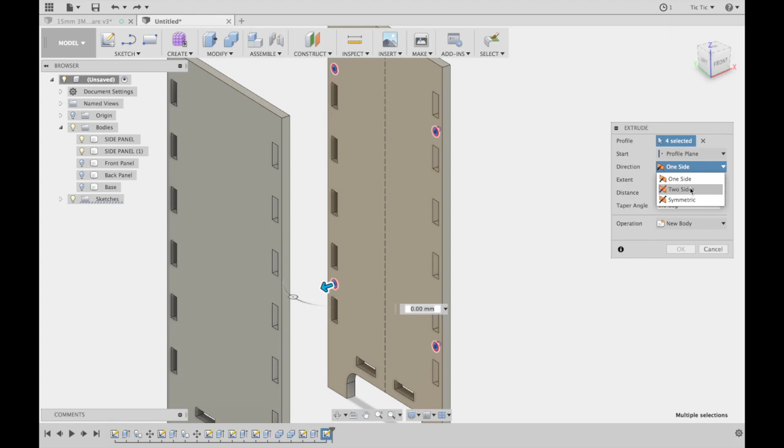So now there we have it. We've got those holes through there, and I realized that I just did that wrong. Control Z. I didn't go all the way through all of them. So let's just go, it's a two-sided extrude. So let's go modify this one, this one, this one, and this one. Let's just choose two-sided this time, and to object this one, and this one is to object this one.

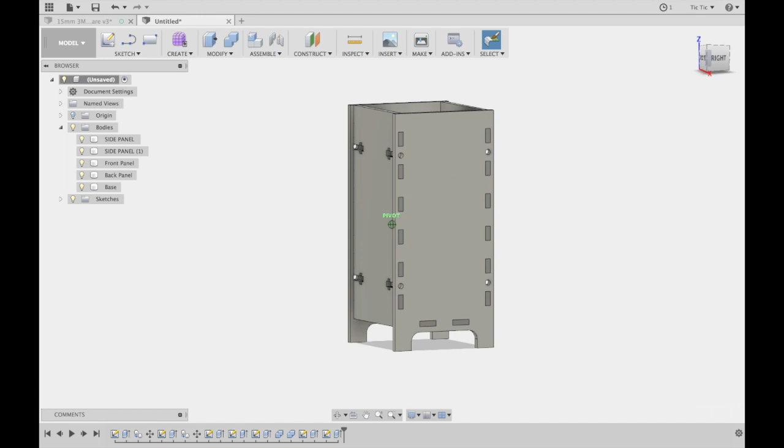That will work. So now I've got all of the holes in all of the sides, and I'm pretty happy with that. So now I can turn everything else back on. It's now ready for me to set up for the cutting of the panel. Notice I don't have to put any in this one because they're all held together by these four. Anything in here would be redundant, and that's being held in place just by those two fingers that stick in on those finger joints. That will hold that in place.

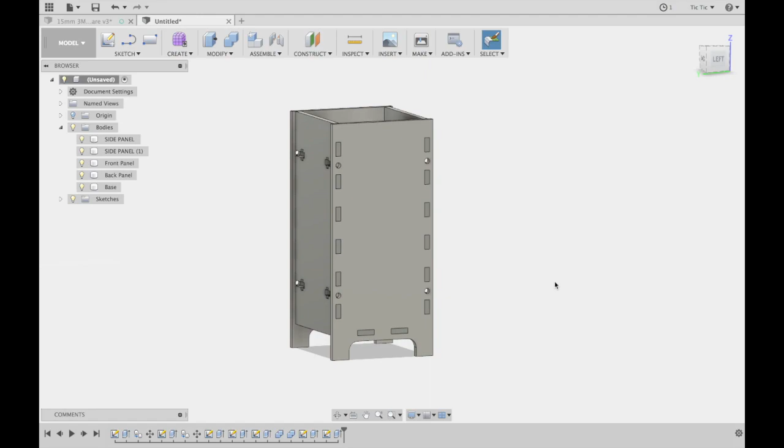Now that you've got a good idea of how to use this design, you should be able to use it to create a range of items and objects. This type of design has a number of pros and cons for use when you're creating with Fusion 360 to laser cut. The pros are the general, simple, easy design and assembly, so you can design very easily and quickly and create objects that are easy to assemble. There's also the ability to disassemble the items that you can create.

The joints are fairly strong, so the screw joints work quite well and are very strong and hold the pieces in place with little or no movement. Some of the cons are the appearance of these particular joints is not very nice because the screws are visible, and sometimes that isn't very attractive to what you're trying to achieve. You also can only really make these joints at right angles.

You can make other joints at angles to make a 45-degree panel, but you can't join those two panels together and expect that the 45 angled panel will be nice and neat. The other thing that you have to consider are the hardware impacts. If you're trying to create an open box which fits a perfect square object, you can't use this technique because the screws, or the nuts in particular, impact into the space that you have created.